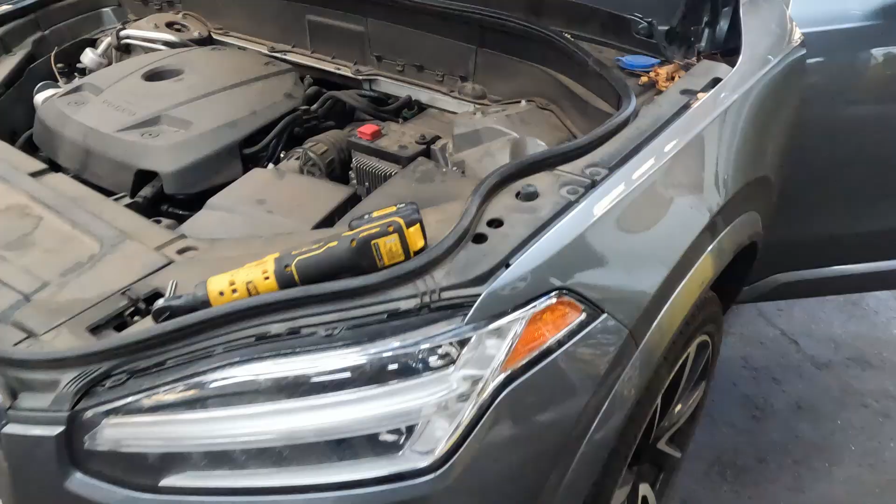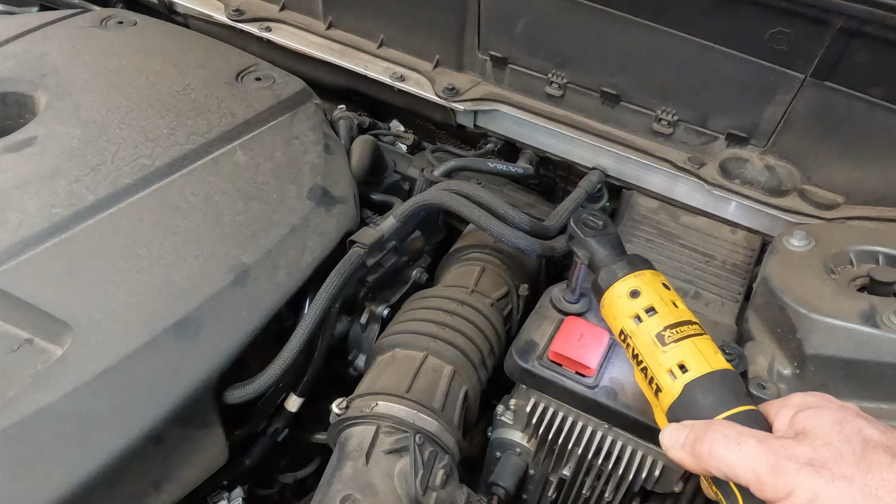That's why they're here. Before we get too crazy in diagnosing, we're gonna check what's pretty common on these. This is the start stop battery, or the support battery. So we're gonna take this cover off. It's just these two 8mm bolts, and they're very long. So on the side there, I'm gonna carefully lift this cover off.

So to the side, and in here is the battery, and we can already see right away this battery has a lot of corrosion all over this. We'll measure the voltage on it. I bet you it's way less than 12 volts. It is the 39th week of 2018, so it's the original battery. Let me go grab my voltmeter and I'll show you what we found.

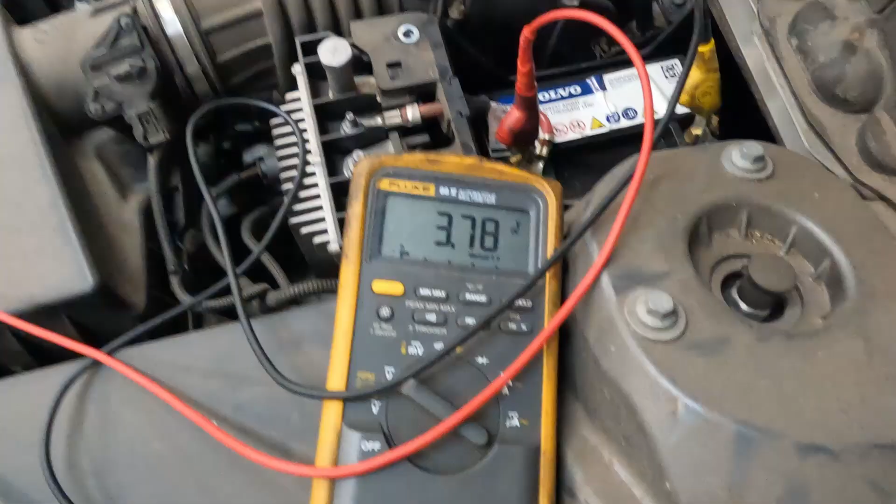So with our meter hooked up, you can see we have less than 4 volts. That's a 12-volt battery. It should have at least 12.5 just sitting there and running about 14 volts or whatever the alternator is putting out. It should closely match the battery in the back. So we'll test that battery too, but since they said they replaced it, it should be good, but we'll double check it anyways to make sure the alternator is charging.

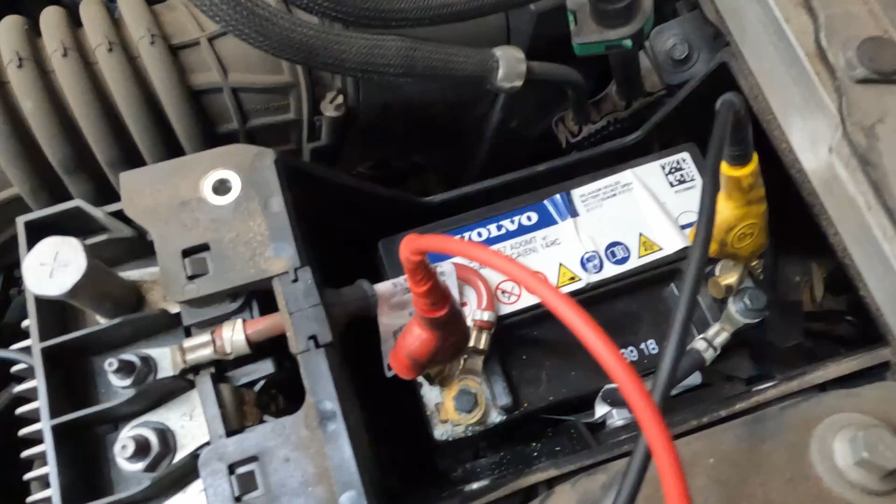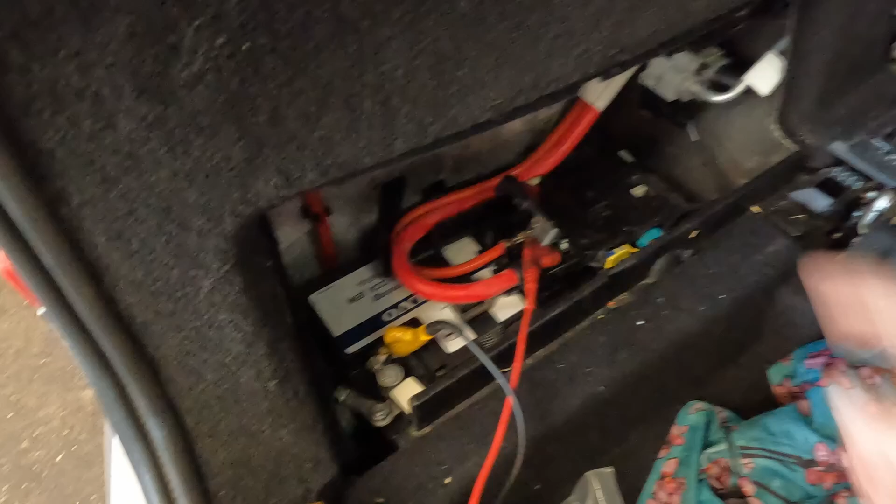And most likely this thing just needs a battery and a positive cable. There's also a reset procedure after you replace the battery that I'll show you too. So back here I've removed the floor panel. We removed this panel here to gain access to the battery. It is a new Volvo battery. With the car running, we have 14.7 volts, which is really good. So let's go compare to the front, and it should be pretty close to the same.

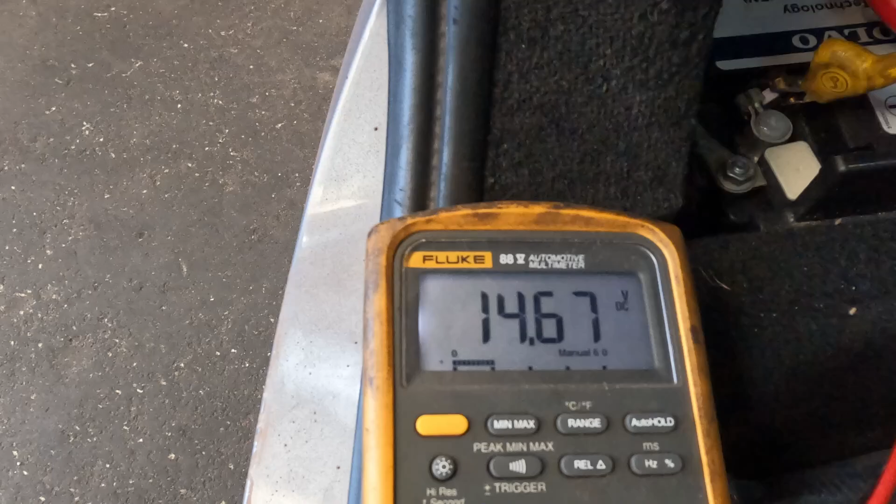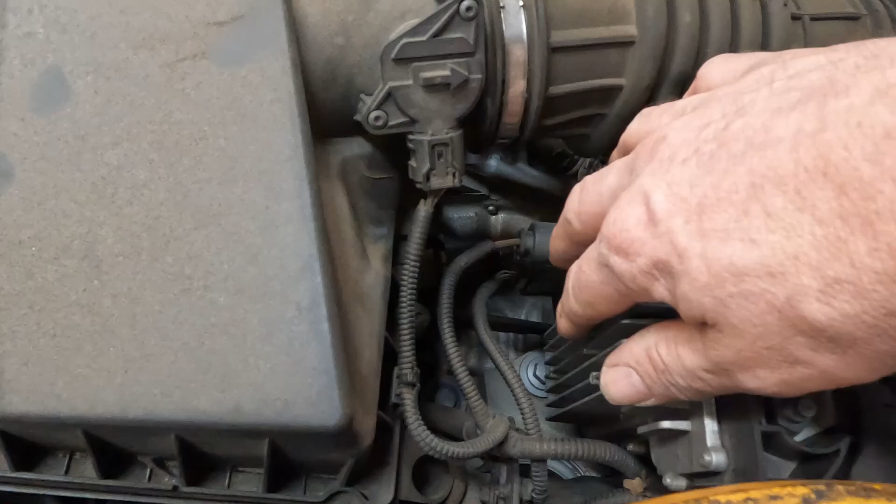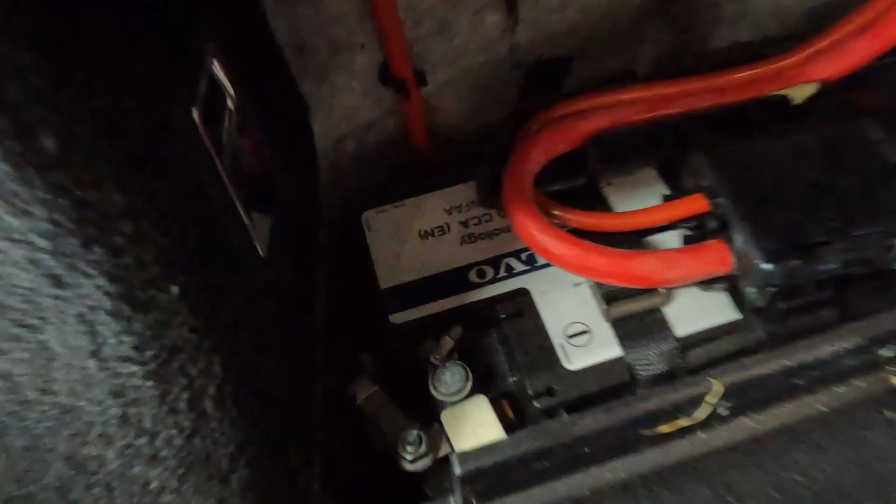We're gonna let it sit for about 10 minutes. Just let all the control modules go to sleep, and then we're going to go ahead and pull the negative cable on the battery. There's a little twist lock under here. Twist, pull that panel out to get to our battery, and we're going to undo this negative post, and then we'll let that sit. And then when you go up front and pull the support battery, replace the battery and the cable, and then I'll show you how to reset the battery control module that it's hooked up to.

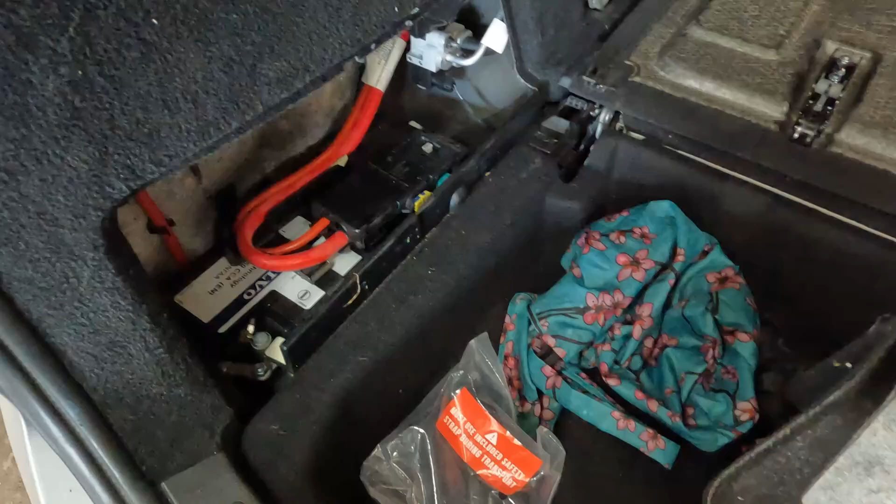Okay, so we replaced the battery and the positive cable because it was corroded really badly. I did notice that this new battery has a little bit higher rating, so maybe that's the difference. So we're gonna hook it up to our meter here, and yeah, we're at 13 volts, which is a good start. So I've already started this once, and I know that its charging voltage is at 14.7 or something like that. So we know that we got it good and got it fixed.

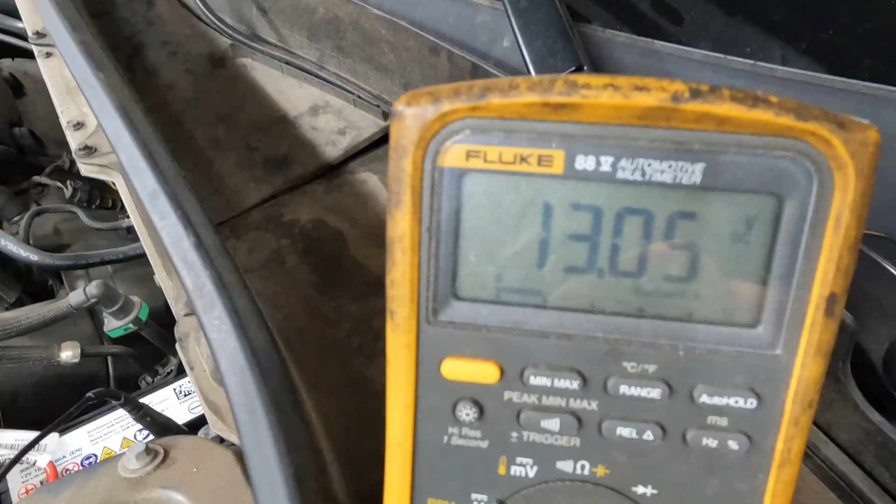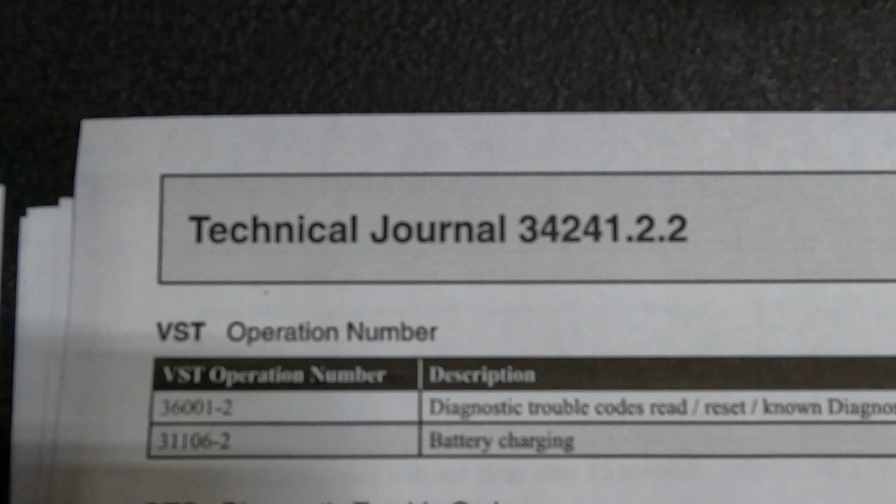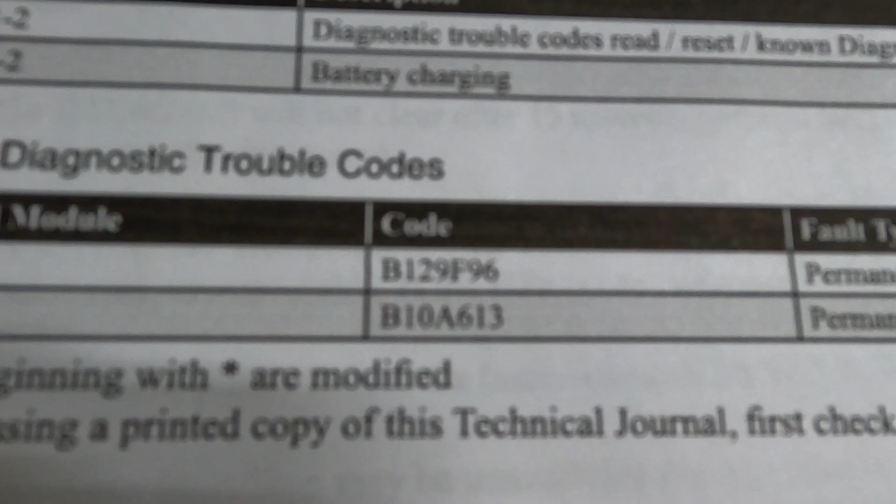So here are the actual instructions on how to do the battery reset. This is from the Technical Journal 34241.2.2, which you can find online. You can Google it and find it as well. And these are the codes that we had, and they're in the central electronic module, and they would not clear. They're permanent faults for sure. So after finding that bad battery and that bad cable, replacing it, this is how you do the battery reset.

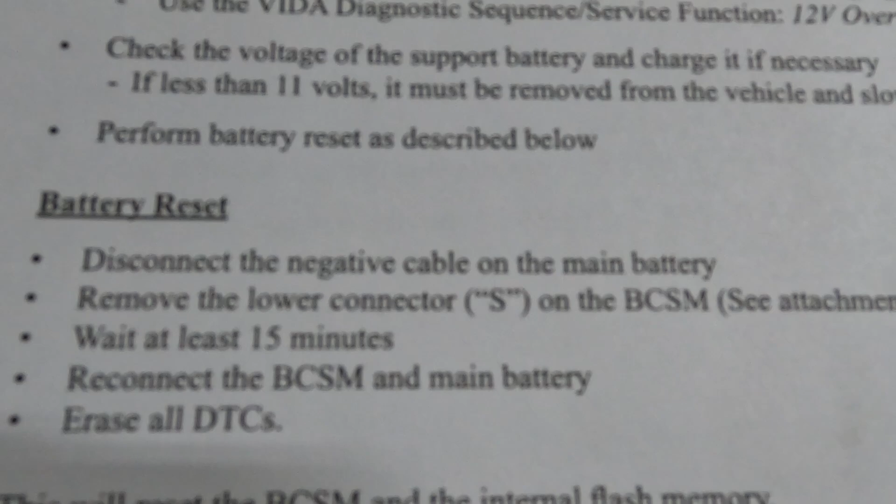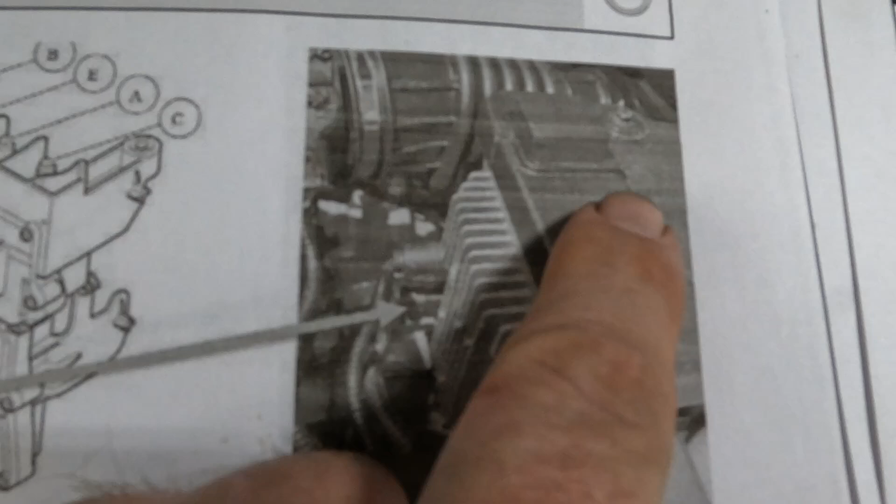You disconnect the negative battery cable on the main battery in the back like we did. You remove the lower S connector, which is this one right here on the module. It's this bottom one. This is the lid that we pulled off to access the support battery. There's a connector here and a connector down here, and that's the one you disconnect, the very bottom one.

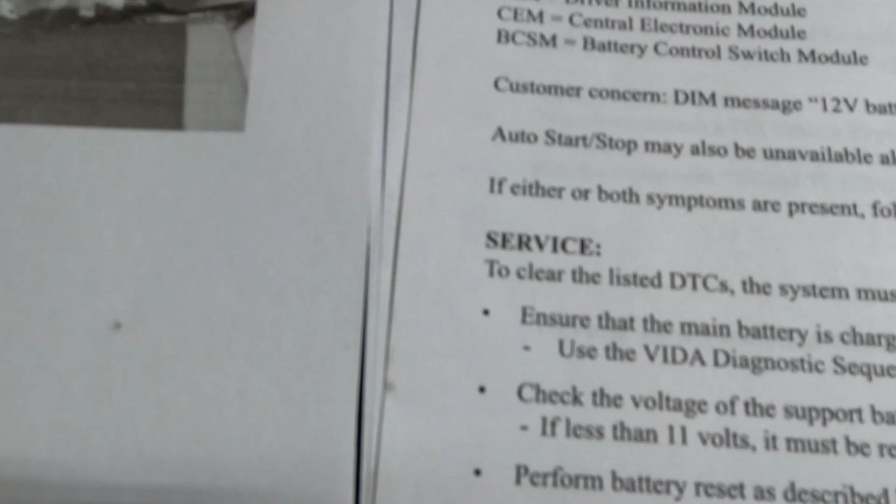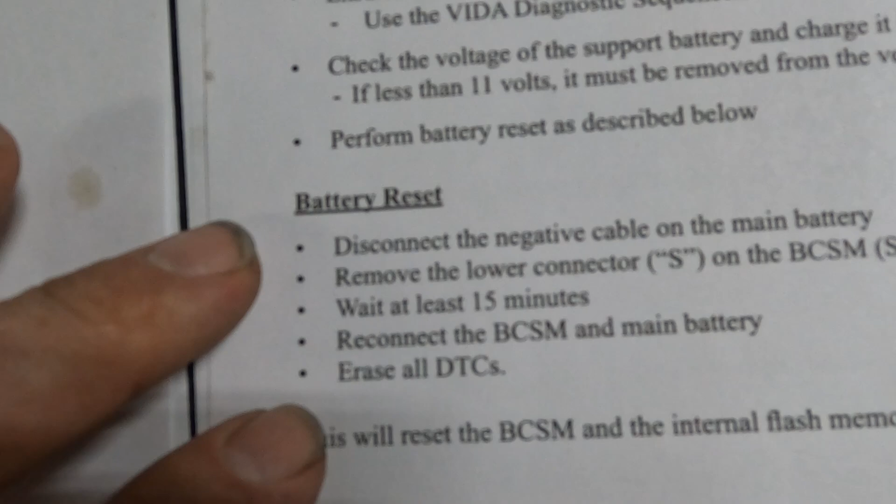Now you're going to disconnect it, and they say for 15 minutes, but we find it's more like an hour, and that resets the module. You can try 15 minutes and plug it back in and see if it works, but it's usually an hour. Then after you wait an hour, you reconnect, plug that connector back in, hook up your main battery in the back, and then start it up.

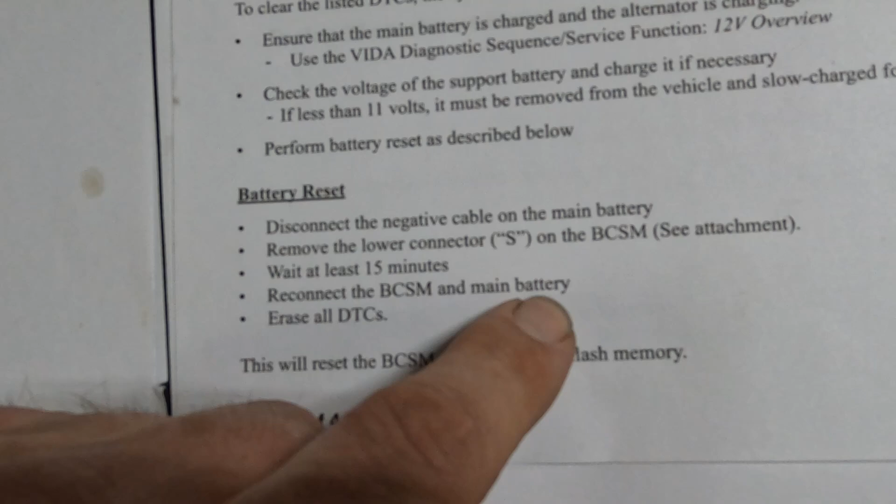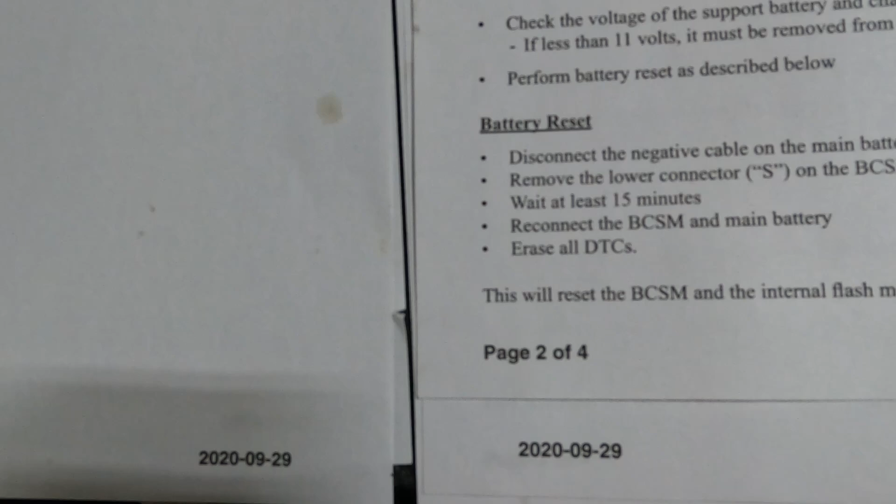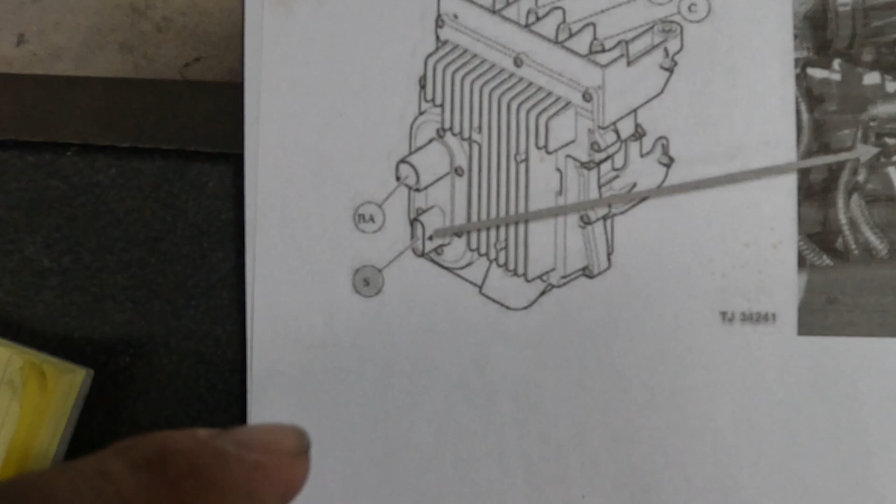And most of the time the codes are clear and the warning lights are out, but sometimes you have to erase the codes again, and then go drive it. And if you go drive it and the warning codes don't come back, which I guarantee they won't, then that's it. It's pretty simple, pretty easy to do. And once again, here's a shot of the module, and that's the connector on the bottom. Pretty easy to unplug, and that's really it.